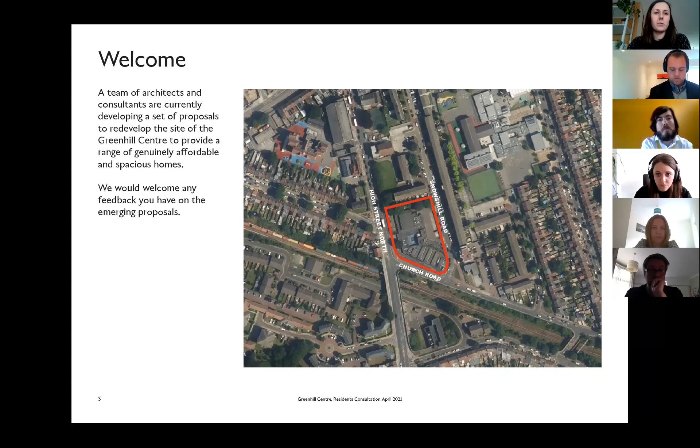Onto the next slide please. So the team is made up of myself, James Cross, Senior Development Manager at Newham Council, Haworth Tompkins Architects, ME Landscape Studios. The structural engineers for the project are Graphic Structures, and the team helping us deliver our sustainable and energy criteria will be Max Fordham. The project's also supported by Project Manager and QS provision by Potter Raper and Associates. Thanks very much.

Thanks James. So Harriet and I are here from Haworth Tompkins Architects. We're based in North London, and we work across a whole range of sectors and types of buildings. One of those includes residential buildings, and we work providing homes for housing registered providers, local authorities, and also private developers. This project I'm showing on screen is an example of one of our projects in West London, which was for Peabody. This is really here just to show you how we work with the existing character of a local place, using materials like brick to create a new approach to residential developments that fits into the existing character and context of a place.

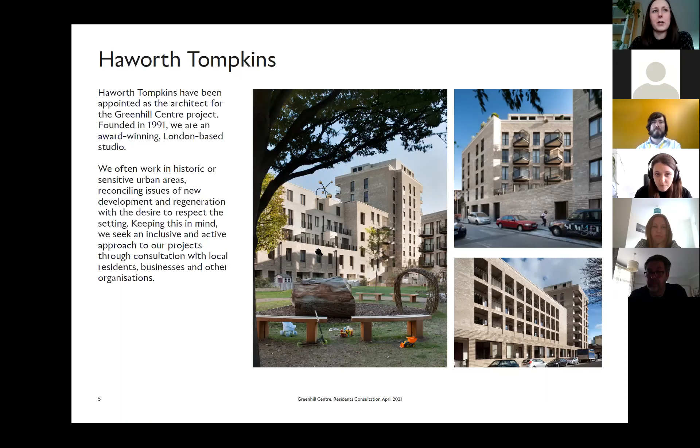So here you can see this example project has a range of heights across the development, ranging from 4 stories up to 9 stories, using setbacks and different brick textures and tones to do some of those things I just described.

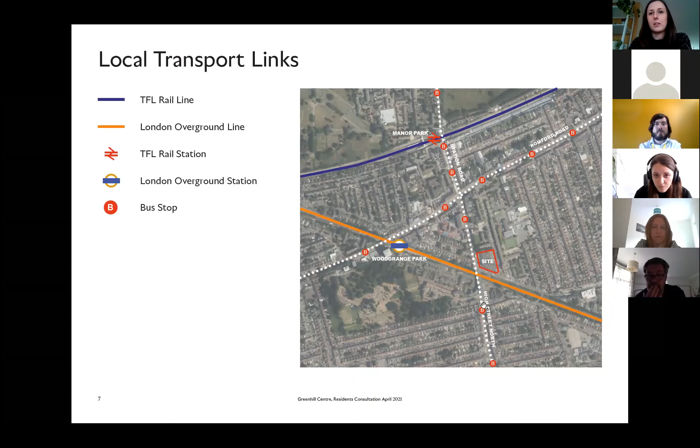So the Greenhill Centre site is located here. It's to the east of Woodgrange Park Overground Station and to the south of Manor Park railway station, which will also be a Crossrail station in the future. The site has a number of bus stops in local reach of it.

As James mentioned, there is currently a one-storey building, with some setback two-storey part, on the site, with some car parking to the rear or access off Snowshill Road.

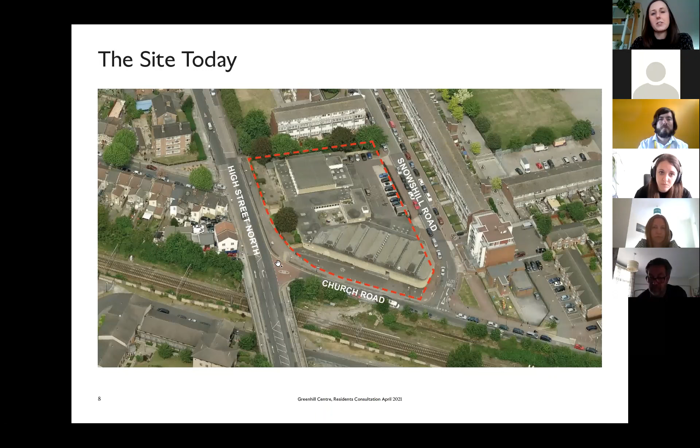On the next few slides, I'm going to go through some site analysis we've done of the character of the different streets that this site faces onto.

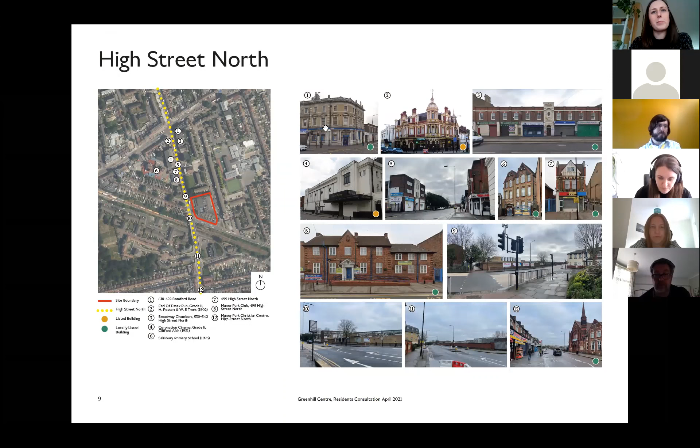Starting with High Street North, which is to the west of our site, this is perhaps the main artery route that the site faces onto. It's very varied in its built character. You can see some examples of the buildings along High Street North. There are a few locally listed buildings there, which are quite beautiful in their architectural character and details.

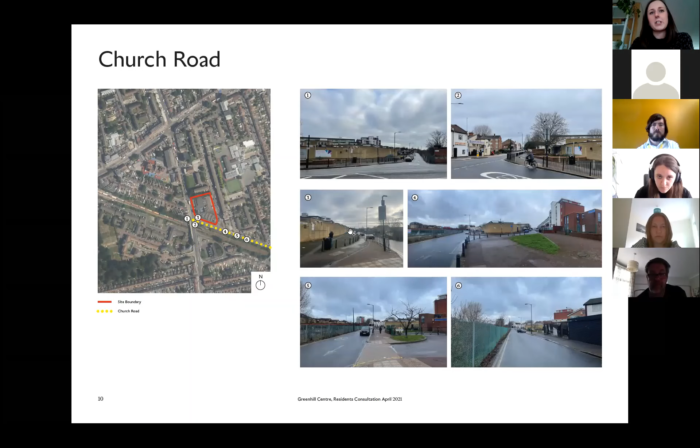Moving on to Church Road, this has the railway as its opposite frontage to the site. You can see some photographs on the right-hand side of this slide of the frontage on Church Road, which is quite wide and open feeling, with some level changes which we're looking at approaching.

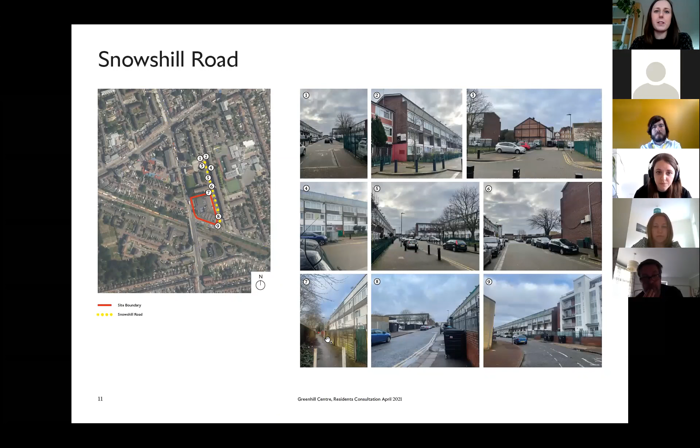And then Snowshill Road, to the east of the site, is very residential in its character. There are some four-storey buildings, predominantly, along Snowshill Road. Also, just to the north, shown in photograph number 7, is Snowshill Passage, which runs along the northern boundary of the site.

I'm going to hand over to my colleague Harriet to talk through the brief and opportunities.

Hi, so yeah, we're looking at around 80 homes on the site, 100% affordable and 39% family homes. We're looking to achieve a very sustainable scheme with passive house principles.

There's going to be reprovision of the gym on site to replace the gym that's there at the moment. Overall, we're looking at a high architectural quality, retaining the existing landscape features and having legible and active frontages around the scheme.

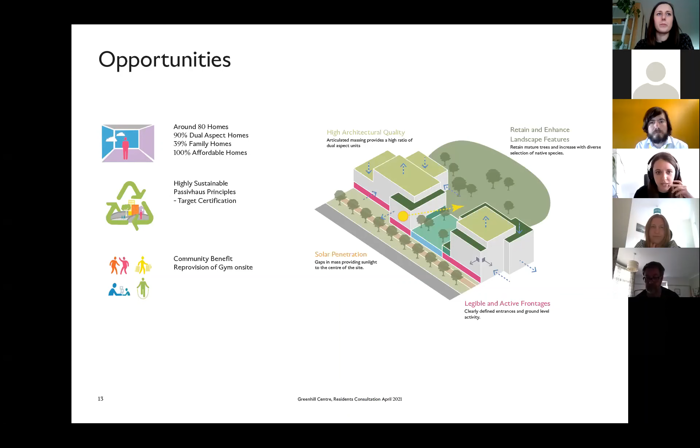So there's been many factors to consider. We've done a lot of site analysis, some of which Laura ran through before. We're also trying to develop the scheme to have the lowest impact possible on the existing neighbours, and looking at the positives to the site.

There are some really lovely existing mature trees which we're looking to keep, and we're also looking at the factors we need to think about to make sure the houses we deliver are as lovely as possible for the people that live in them - so, noise considerations from the railway and High Street North Road as well.

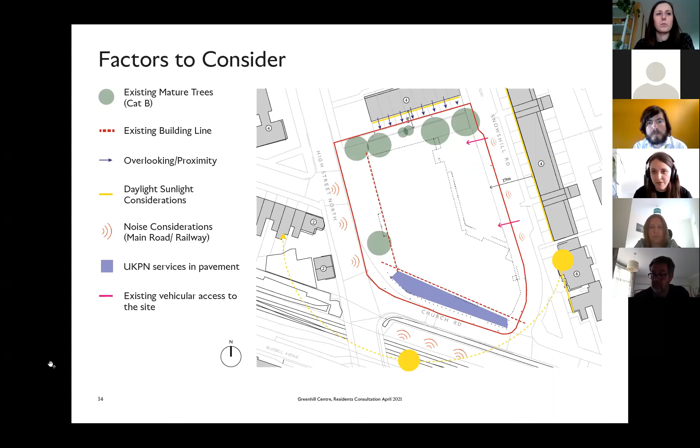We're working with a team of specialist consultants to help us work through the various issues.

So this is diagrams of how we developed the design. As I just mentioned, we're looking at retaining the existing mature trees and using that to enhance the proposed landscape that will add to the project.

There'll be a residential courtyard for residents to use in the centre, protected by the buildings. We're going to have as many active frontages as possible, with doors at ground floor to activate the street frontages. And then you can see the gym, on that High Street North to Church Road junction.

The residential entrances - we're looking to have through cores, so residents in the homes can easily access their garden. For servicing and parking, I'll talk about that a little more in a minute, but there are just 3 accessible spaces to the north of the site, which will hopefully minimise traffic down Snowshill Road.

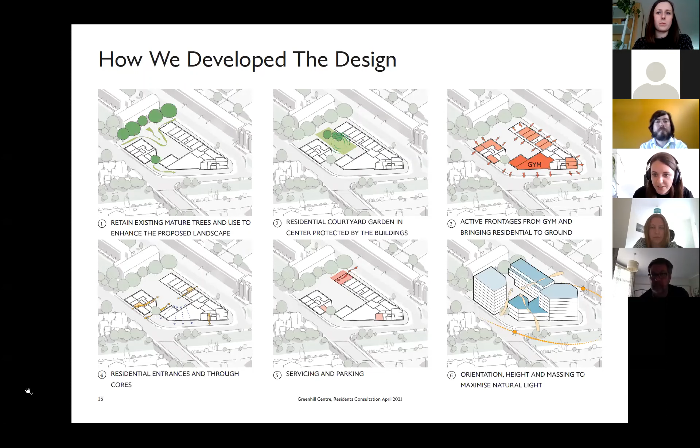And then the last diagram just shows the orientation and the height, which we've carefully designed to maximise natural light and lower impact on neighbours.

So, the parking - the development will be car-free in accordance with council policy. New residents will be unable to hold parking permits on the surrounding streets, and parking permits there will be reserved for existing residents. But as I mentioned previously, accessible parking will be provided on site for the accessible dwellings we'll be providing.

So this is an initial sketch of our proposal. As I mentioned in the brief, we're looking at around 80 new homes, with a large number of family homes, which will have a communal garden in the centre.

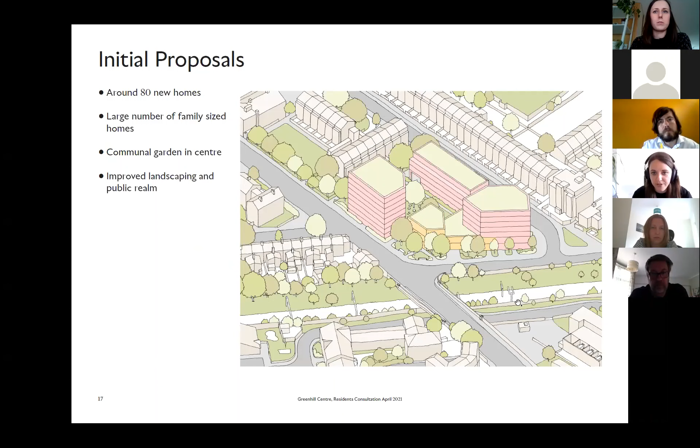We're also looking at a wider improvement of landscaping in the public realm, especially in the area Laura mentioned, which is currently quite a blank facade onto a wide, unused pavement.

Here's the kind of initial ground floor sketch. You can kind of see from the blue arrows, they're pedestrian entrances. So we're looking at getting as many front doors on the street as possible, which adds to activity along the street and meeting neighbours. And then there's some more technical things there, like where the refuse stores and cycle stores will be. And you can see in the yellow shade, that's where the new gym will be located.

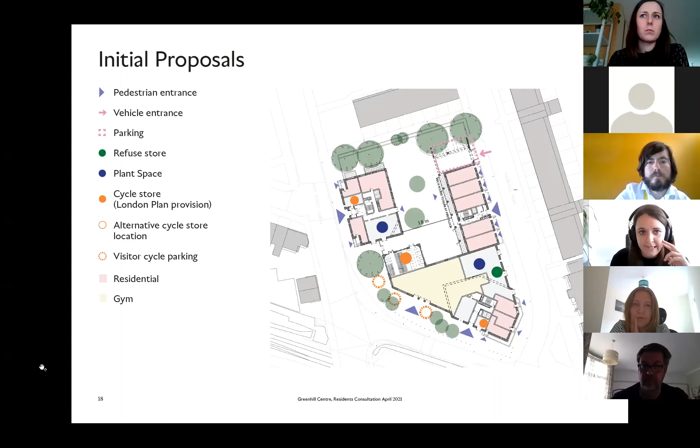And I'll hand over to Mike now to talk through the landscaping proposals. Thank you.

So this is a plan showing the initial approach to the landscape. As Harriet and Laura mentioned, there's a number of existing trees - 4 category B trees quite close to Snowshill Passage and 1 along High Street North - and they're being incorporated into the overall landscape. The central courtyard space will provide seating opportunities, grow-your-own raised planter areas, and play opportunities for younger children. So the central courtyard will have a number of functions within the landscape, and we'll also be incorporating additional tree planting within that space to provide extra planting and reinforce the existing trees.

And then along Church Road, as Harriet mentioned, the wide footpath at the moment is to be broken up to provide a new landscape strip, almost like a linear space that runs along Church Road to High Street North, providing a range of opportunities, including seating. Possibly also a space across to the other side of Snowshill Road, where there's currently a grassed area. This area can have additional planting, possibly seating, and also potentially some raised planters as part of a grow-your-own area for surrounding residents.

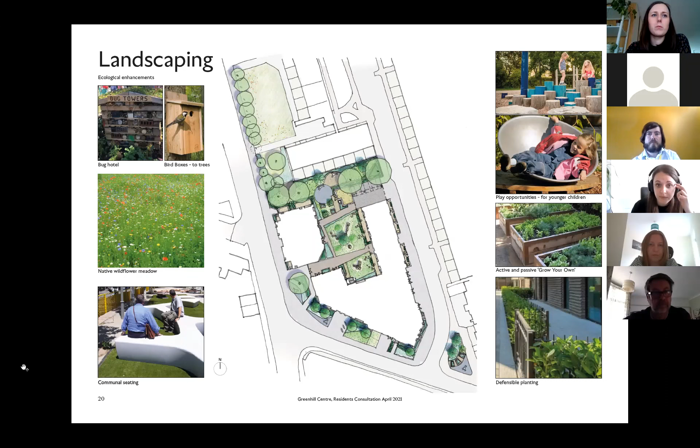And I think the next slide is just again some of those images. So we'll be looking at green roofs as well. So that plan that we showed previously is at the ground floor level, and on various roof levels, we'd be looking at providing extensive green roofs, or possibly green-blue roofs as well, so that we're actually greening up roof areas where we can, given limitations in terms of having to incorporate photovoltaic cells or plant.

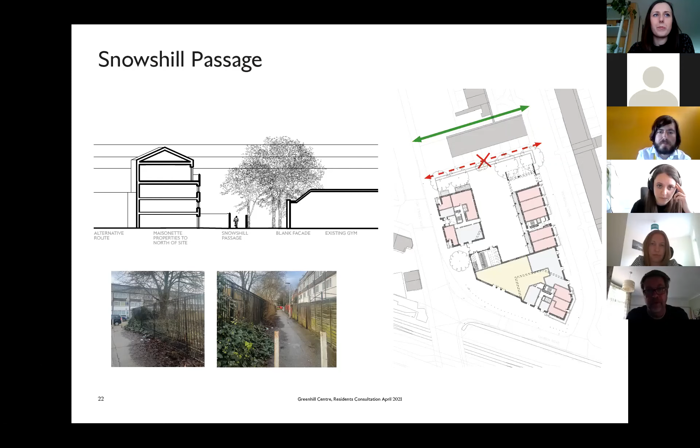And then the next slide. The current idea is that the Snowshill Passage would be stopped up, and that space, which is within the site boundary, would become part of the garden space. So that northern area would be a quiet space for seating, for biodiversity, and would enhance the existing trees there. And then there would be improvements to the maisonettes to the north to provide a suitable link through between Snowshill Road and High Street North. So we're currently developing ideas which basically works on that proposal.

And I think I'm handing back to James. Thanks, Mike.

So following the presentation from the architects and the landscape architect, I'd just like to summarise some of the benefits of the proposals. So we're looking at around 80 new homes on the site. All the homes will be affordable, either at London Affordable Rent or through a shared ownership product. Newham Council is committed to delivering 39% family homes, and that's the target at the moment. Looking at improving the active participation around the pavement, around the front of High Street North, and really making a positive addition to that High Street.

Newham has a commitment to the climate emergency, and the scheme will follow low energy design around the principles of Passivhaus—a low energy building with a low carbon footprint that will help residents avoid fuel poverty throughout the lifetime of the new homes. We're also looking at improved green space, together with communal gardens. And to further enhance the green credentials, the scheme will be a car-free development, meaning homes will be advertised as car-free on the choice-based lettings website for new residents.

We'll also be looking at promoting social value through our procurement routes. That involves, when we go out to seek a contractor to build the new homes, that they'll commit to localised employment and apprentice schemes and other such features to help boost the economy. We'll also be promoting sustainable travel through the use of bike stores for residents and visitors.